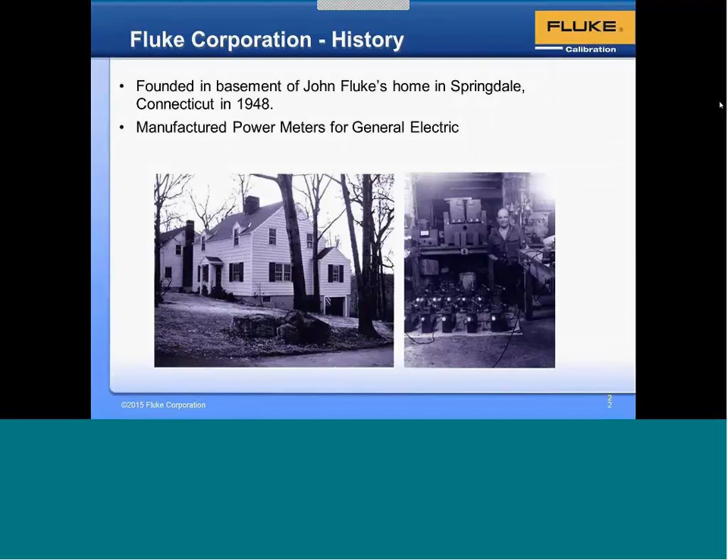Today, we have over 2,400 employees worldwide, and the corporate headquarters is located 30 miles north of Seattle in a town called Everett. These products are distributed in over 100 countries, and the Fluke Corporation has different brandings. There's the Fluke banner, which is primarily oriented around the multimeters and power meters you may well be familiar with. We have Fluke Biomedical, which services the medical markets. We have Fluke Networks. My particular group is the Fluke Calibration Group, and all of these companies fall under the Danaher Corporation banner, which also includes companies like Keithley and Tektronix.

Here's an idea of some of the products that we supply worldwide. The top of the list is our calibration equipment and measurement standards. These products are sold into the national labs of various countries. We get into the premier level of metrology with these instruments, and these instruments are all used to calibrate, for example, all the instruments you see below. We also have process calibration tools for the field calibration of processes and factory equipment, the regular multimeters that you see with electricians oftentimes, and then biomedical equipment. One of our newer entries is the thermal imaging instrumentation, the thermal cameras used in a very broad spectrum of markets, anywhere from simple housing energy studies up through thermal preventative maintenance issues with large equipment.

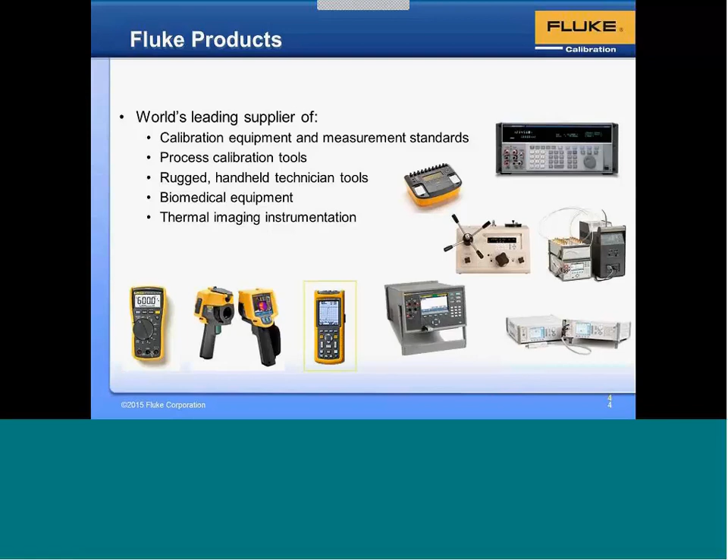Again, my group is the calibration group, and we're pretty proud to say that we're one of the largest calibration-focused businesses around, and again have global sales, manufacturing, and service throughout multiple regions. We have solutions for electrical calibration, temperature calibration standards, and pressure and flow calibration. Those are our three primary discipline areas.

On the data acquisition side, again part of the calibration group, we started off in 1974 with John Fluke Sr. putting out the very first, as far as we know, commercially available microprocessor-based data logger. From there, we were also one of the first to offer an off-the-shelf wireless logger solution for 900 megahertz and 2.4 gigahertz in 1994. When we started getting into our other products, we offered up the first Ethernet-only data acquisition system. In other words, there was no other way to communicate with us, no RS-232 or USB or anything at that time. That was in 1996, and it was a very successful product line called NetDAQ.

The follow-on to that was an introduction of a large frame Ethernet-only product called the 2680 series. That's where we ran into InduSoft after looking around the block, and we found that we had some needs that were unserved, so we engaged InduSoft to work on the FlukeDAQ product, which I believe was around 2000 when we launched that, and that was FlukeDAQ 1.

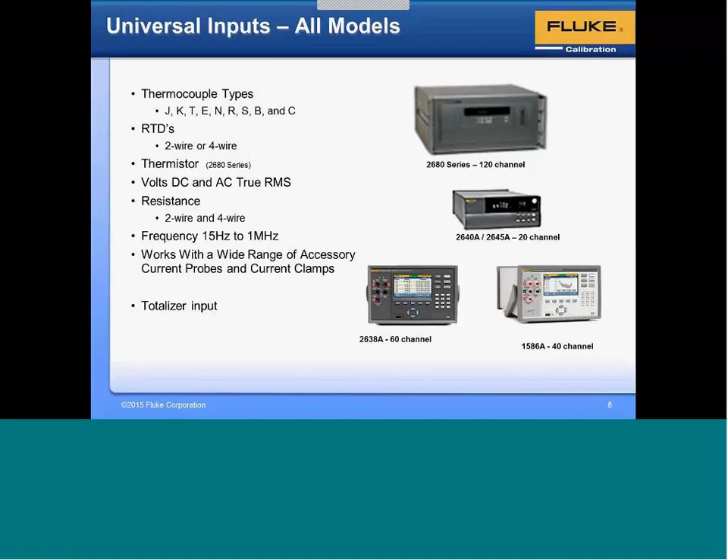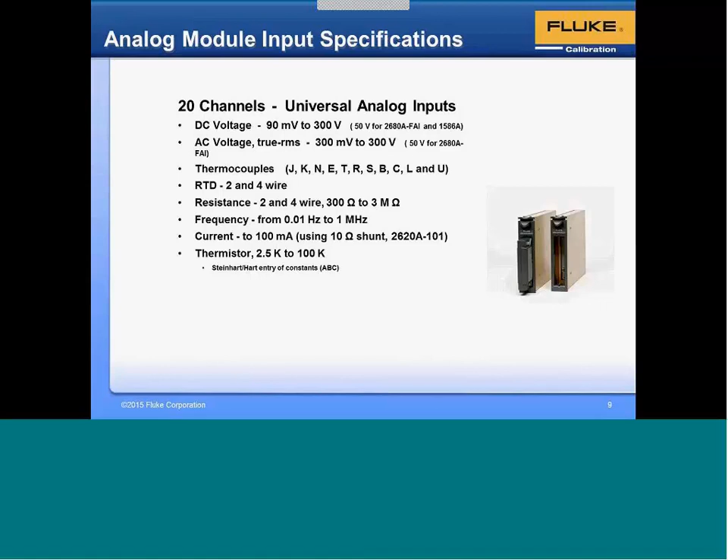The analog modules that we have, or the analog inputs, come in basically 20-channel blocks, if you want to consider it like that, with universal analog inputs. Here's some more detail: DC voltage up to 300 volts on many units, AC up to 300 volts, all the thermocouples, 2- and 4-wire RTD, resistance, frequency, current, and thermistor type inputs. These are common to most all of the products that we have.

The newest product I mentioned is the 2638A, and that's the Hydra Series 3. We have a sister product to this called the 1586, which is part of our temperature discipline group. They're out of American Fork. They've been tailored for various specifications depending on the market need.

The 2638 is expandable, comes base with 20 channels, but is expandable in 20-channel increments up to 60 input channels. These are all relay isolated channels, so very high isolation, limited to very few ground loops. Our hallmark specs here are the thermocouple accuracy, which has been the hallmark of all of our data acquisition products.

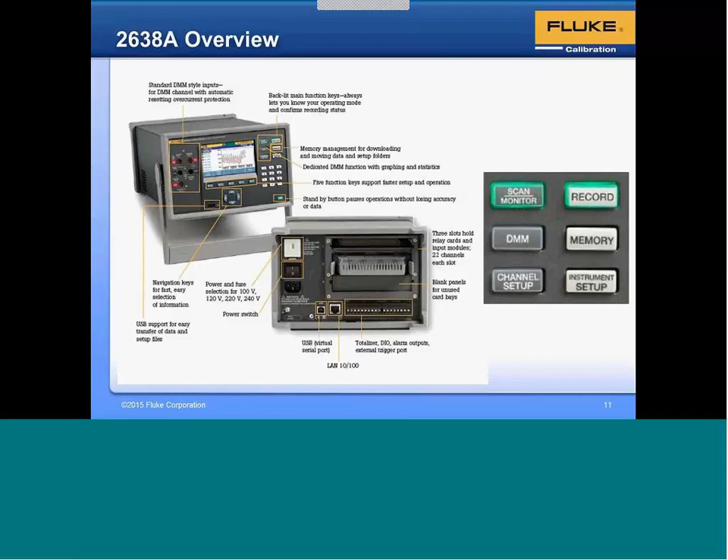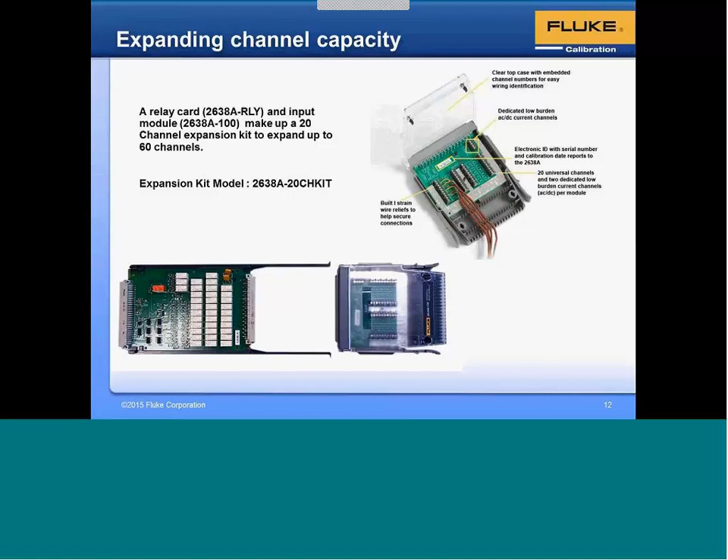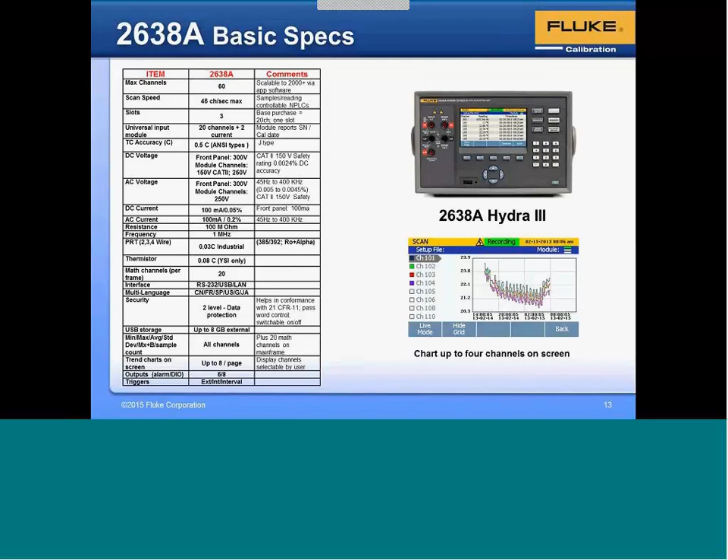One thing before we go on, the chart in the lower corner shows charting of 4 channels that we can do on the instrument. Being a standalone instrument, you may want to take a look at channels as they're being recorded, so you have the ability to change that. You also have all of the data, as shown in the upper screen, of the data coming in, plus you can do concurrent statistics on that screen.

Now that we've gone through the overview of the hardware, my favorite part is really the applications we've been involved with. These next few slides are just broad examples of applications Fluke has been involved in since day one on the data acquisition front. After that I'll show you a couple of modifications done using the InduSoft's FlukeDAQ package.

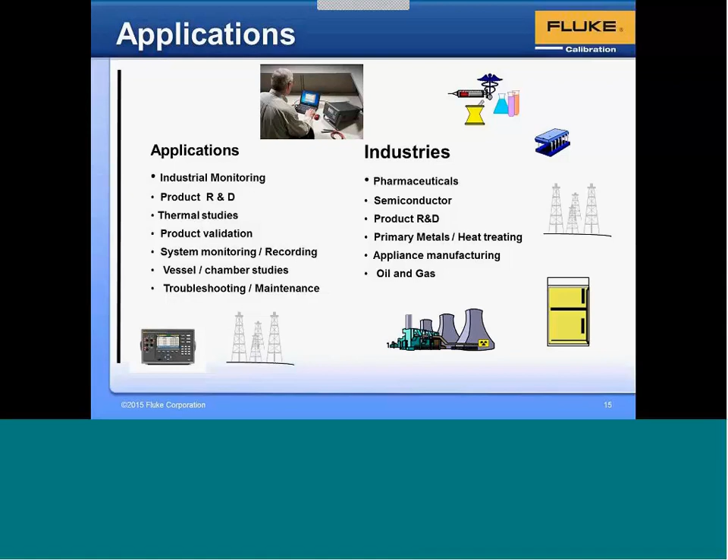This is where we're monitoring high voltage switches, where you might be in a distribution yard bringing in several kilovolts of voltage that need to be switched to another area. This particular monitoring system monitored the air pressure or oil pressure which drives the conductor into the switch, because there's a lot of concern over connectivity there, so they can't have anything conductive. So they monitor the pressure switches, the pressures inside the vessels that slam those switches shut, in more of a preventative maintenance and monitoring mode. That's one I tend to like as a point of interest.

On the next slide, we have the pharmaceutical area, where we do a lot of work primarily in chamber validation for a lot of different groups. We also monitor process temperatures and things of that nature. Some of the engineering efforts go through experiments where they're monitoring titer points, temperatures, and pressures.

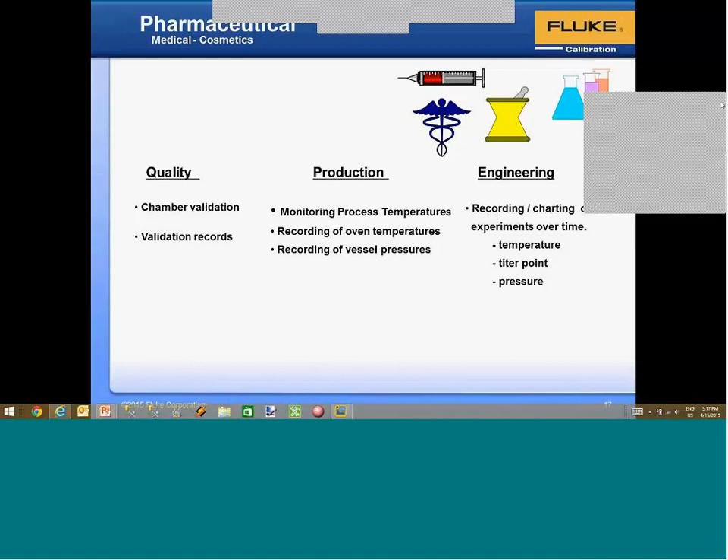Another slide here brings us up to aerospace applications, probably one of the largest application areas, in fact I think the largest application area for Fluke data acquisition products. Primarily we center around defense contract folks, people who get into satellite work where they're monitoring large vacuum chambers and testing satellites inside those chambers, where they need temperature profiling across the entire area.

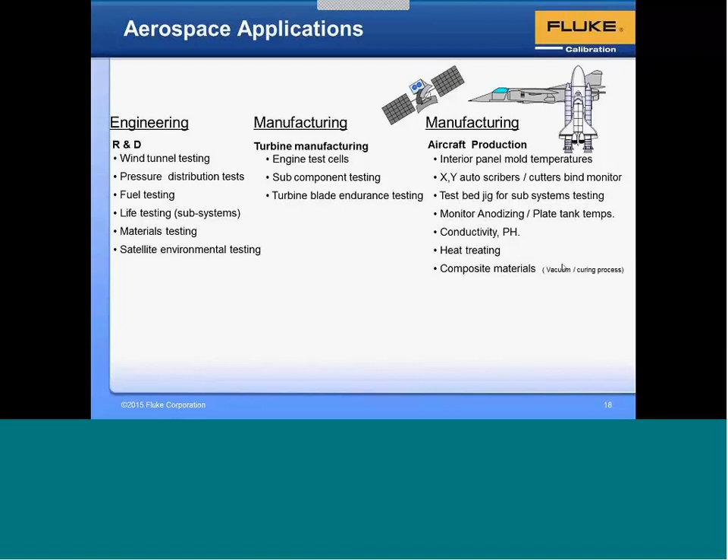We do engine test cells for turbine applications, turbine manufacturing and validating. A lot of different things that are done. The heat treating, the AMS 2750 area, we also do a lot of work in that area as well.

So aerospace is another big application area for data acquisition. And then the last one is the electronic manufacturers, that's us, that's people like Fluke. In those types of areas, there's a variety of groups, a quality group, engineering group, manufacturing type thing. You can see some of the applications we've gone in and helped solve some of the measurement problems and issues, all the way down into some of the wave solder machines that need certain heights and preheat zone temps monitored, especially when they're getting out of control. So we do a lot of different applications overall.

And that brings us to, I do believe, the Fluke DAQ application itself.

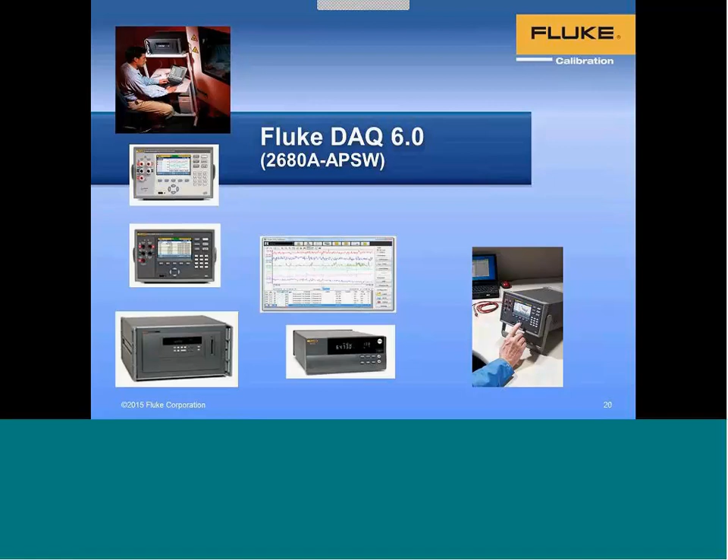Fluke DAQ is something that we have had InduSoft put together for us to communicate to all of our equipment. When we came out with the 2680 around 2000, I believe it was, we recognized that what we really needed was one application that had the flexibility and scalability to not only service the instrument, which is just the primary get it out the door thing, but more importantly to service the customer and the growth of their application and our future products.

So after an extensive review of people out in the marketplace, we selected InduSoft to provide those features for us in the Fluke DAQ application. And I do have to say, Fabio, that we're very happy we made that decision in retrospect.

Some of the basic customer needs we were trying to solve at the time was, of course, to have it work with all of our data acquisition equipment. And we figured we wanted to be able to support up to about 2,000 channels. In actuality, it will support more than that, but that was kind of the limit we put. We have had many customers bump into that limit and have accommodated their growth from there. We wanted an OPC server so we could communicate with other programs, and a web server so we could have web interface and viewing from various points.

Thank you so much, Bruce. I do appreciate it, and thanks for the comments about the partnership with InduSoft. It's definitely mutual—we appreciate the partnership very much, and I'm sure it will continue to be a successful one.

I'm sure. Getting started here, a brief overview about the architecture. As Bruce mentioned, Fluke has many different series of devices with several unique advantages and data acquisition devices with a lot of accuracy and the ability to work in a standalone mode and store information locally on the devices.

The Fluke DAQ software was designed in partnership with Fluke, pretty much with the concept of being a single point of configuration and monitoring for one or several devices connected to the software through any TCP/IP interface—wired Ethernet, Wi-Fi, any TCP/IP interface. About 10 to 15 years ago we released the first version, and we have been evolving this application over time.

As Bruce mentioned, the Fluke DAQ software is simply an application designed with the standard InduSoft Web Studio. This application was put together with three main points to bring value to our customers—three major value propositions. The number one is ease of use.

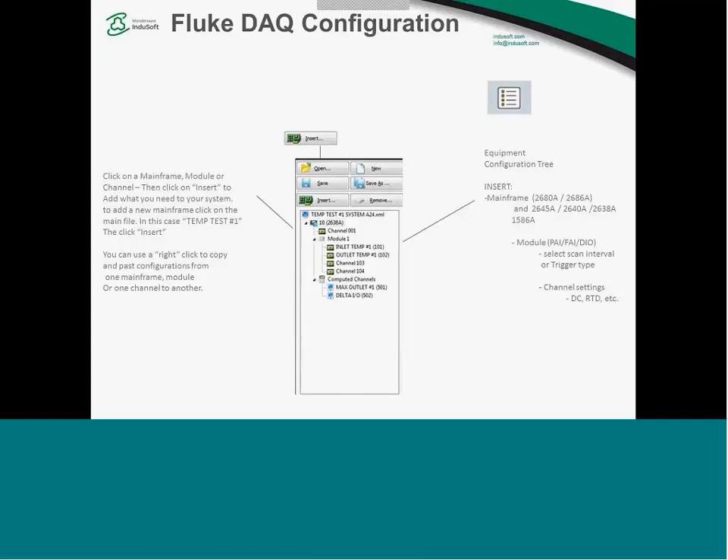On the tree view, you have a hierarchical view of the devices, including their modules and channels, as well as computed channels, which are like virtual channels, not physical channels, that can generate information based on expressions that you define in Fluke DAQ itself.

The configuration is as easy as 1, 2, 3. Number 1, you click Insert and select the type of device you want to insert. Number 2, you add modules for those devices. Most Fluke devices are very flexible and allow you to have a number of modules. Then you add the channels, configuring the channels available in each one of those modules.

As you see here in the tree view, you have a hierarchical view of the devices, modules, and channels. Then it's just a matter of configuring the settings for the channels, and I will demonstrate how easy it is to do a configuration in a few minutes here in the demo.

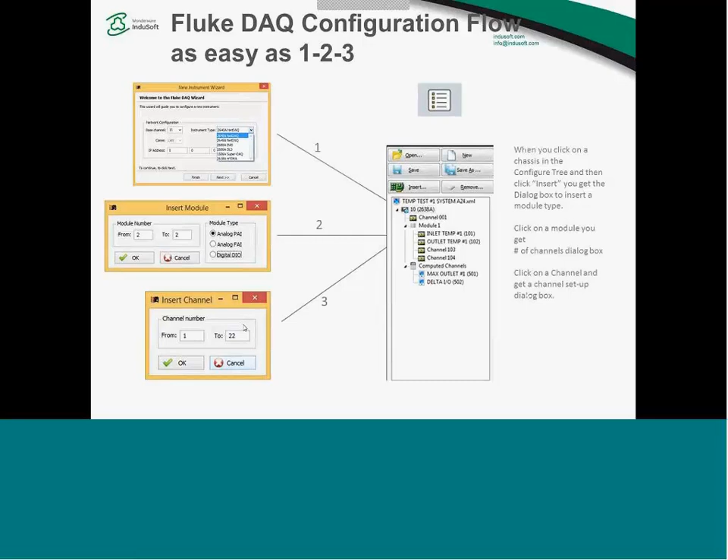There is a nice feature called data file configuration, which is an easy way for you to generate reports automatically. You can define as many reports as you want, define which channels from which devices should be saving data to each report, and define how those reports should be generated - by day, by period of time, by size, by number of lines, and so on.

You also have the option to not only download but also upload configurations to or from the devices, not only using a TCP/IP link but also using a USB interface for Fluke devices that support it. You can also upload not only the configuration but also the history data stored locally on the device in a store and forward mode.

On the monitoring screens, you can stop and start the scan. Keep in mind, everything I'm showing are screens designed with InduSoft Studio, but they are fully functional to support one or multiple devices communicating with this application during runtime.

You can start or stop the scan from each module individually or for all the modules at once. You can get history information from the devices per device, per module, or for the whole system, and import this information into CSV reports that you configure in the system itself.

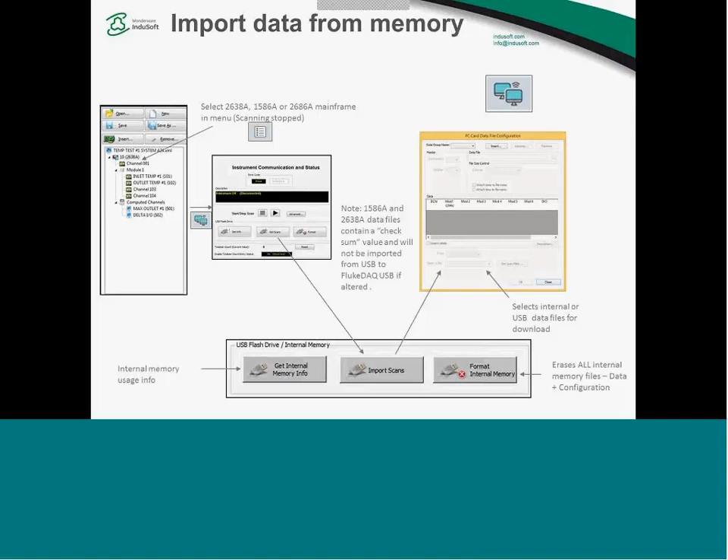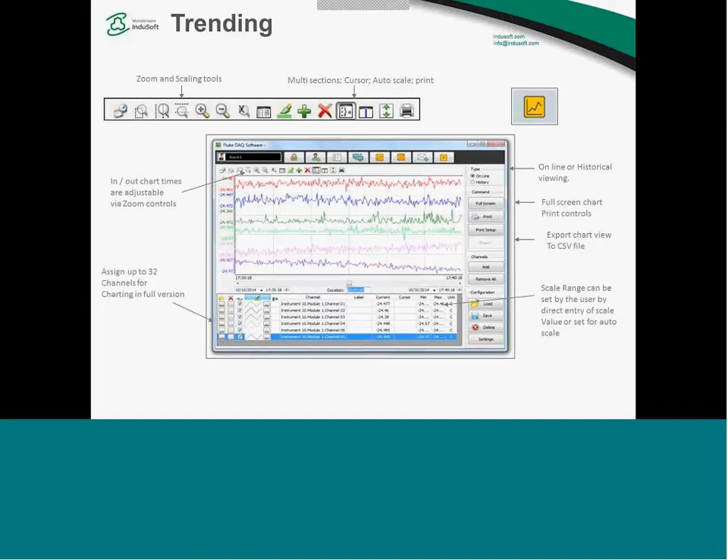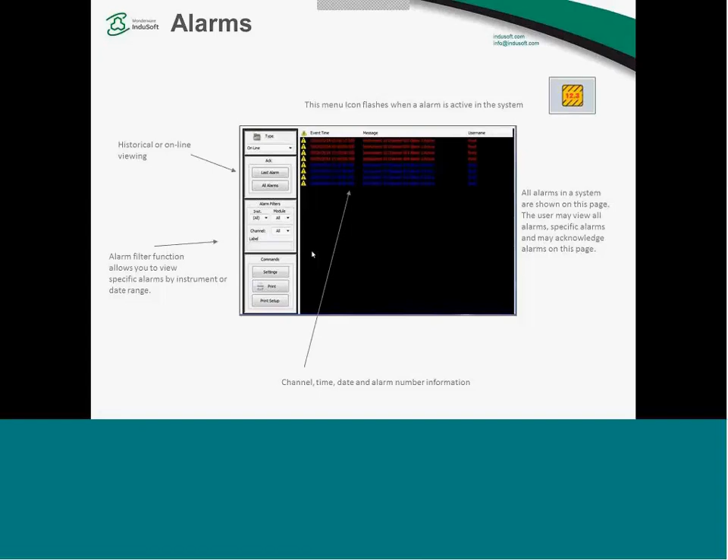So talking about interoperability in a little bit more detail, as mentioned before, Fluke DAQ supports DDE and OPC out of the box. DDE is still very popular in lab applications where it is required to visualize and link data from the DAQs in real time with Excel, usually in Excel worksheets that are used for many different purposes.

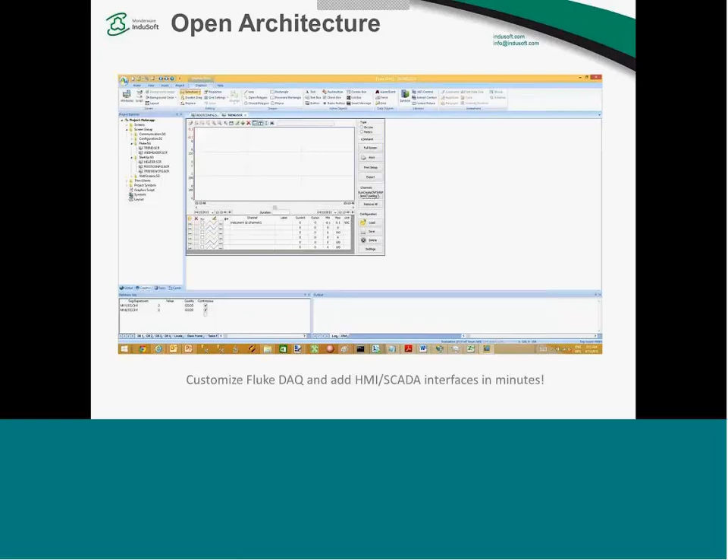Finally, but not less important, there is the huge flexibility and advantage to customize the standard Fluke DAQ application. Some customers use Fluke DAQ as is, because it's fully functional, but many customers take advantage of the fact that they can purchase an InduSoft Studio development license and add their own custom screens to the standard Fluke DAQ application. They can create screens with their tanks and ovens, bring data from different devices like PLCs, send data to different devices, and pretty much merge the Fluke DAQ application with their own HMI SCADA application, just like you can merge two or more InduSoft Studio applications. So you can customize Fluke DAQ to your particular needs.

Talking about the runtime editions and add-ons — Fluke sells Fluke DAQ directly through its channels, and they offer two editions: the full edition with no limitations, and the light edition with the limitations we discussed before — one device only, no full screen mode for the trend, no remote notification for alarms, no remote visualization on the web browser, and disabled ability to export data from the trend as well as the OPC server.

You can always upgrade from the light version to the full version and get all the capabilities from the full version. In addition to the Runtime Edition, you can optionally purchase the standard development package from InduSoft and customize or modify the Fluke DAQ application, adding your own screens and interfaces.

There are also part numbers to upgrade Fluke DAQ from previous versions to the most current version, not only the full edition but also the light edition. And there is an add-on to TrendLink to the most current version, 10.0, as well as a part number to upgrade the external TrendLink from an older version to the most current version. So those are pretty much the main part numbers involved with Fluke DAQ.

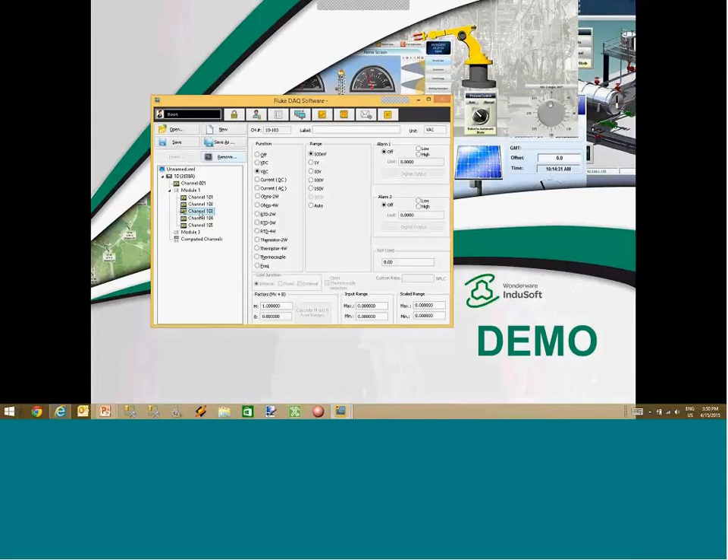And here on the root level, you also have this option to enable data simulation. So if the device is not available for whatever reason, Fluke DAQ can simulate data so you can test your reports and your interfaces before connecting to the actual device.

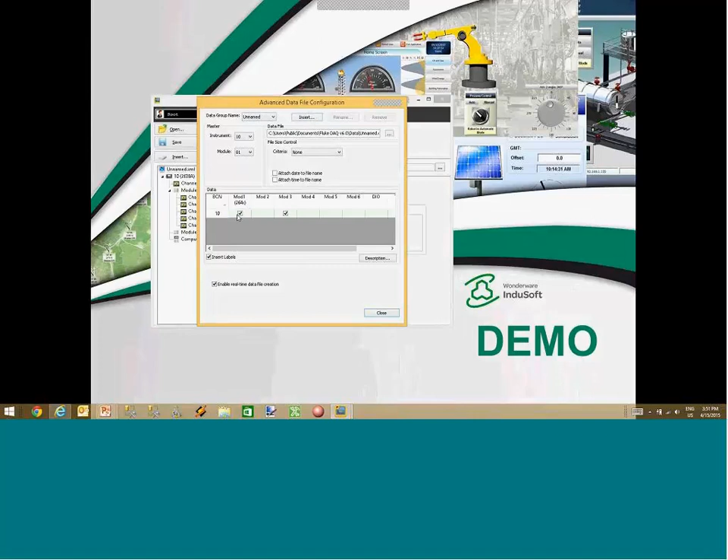And here in data file configuration, you can define as many reports as you want, and keep inserting reports to your configuration. For each report, you define which modules and which channels you want to add, and how you want to break the report: by a particular time in the day, duration of time, file size, or even number of lines. Fluke DAQ will automatically generate those CSV reports with the data collected from the DAQ devices.

Also, an important point I didn't mention: the Fluke DAQ devices are able to acquire data at a very fast rate, faster than would be feasibly possible for software to read through the Ethernet interface. But it has the ability to buffer, to save this data locally on the device itself, and the Fluke DAQ software will automatically download this data from the device in chunks and dump it into the CSV reports with precision of 1 millisecond in the timestamp.

So after the configuration, you can come here to the communication screens and enable the scan for each device individually, or for all devices if you hit the play button at the root level, and it will scan all the devices in the network and start communicating with all of them.

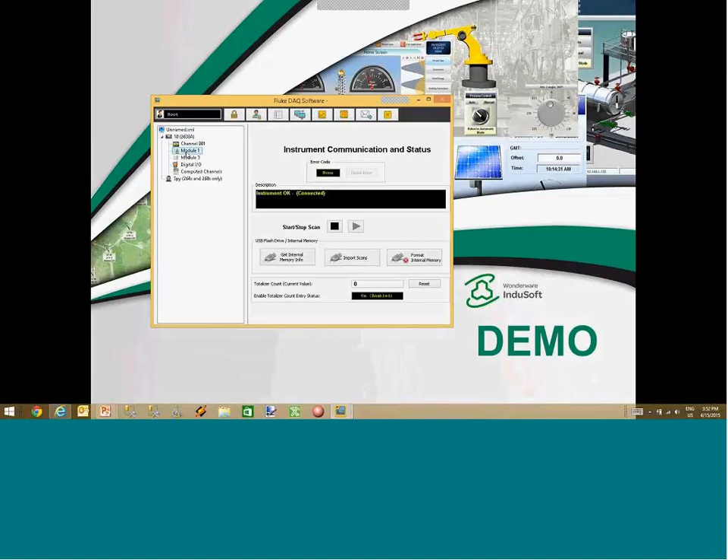So if I go, for instance, to module 1 here, it collects the data from all the channels available in this module and shows the online values on the screen. On the webinar you probably have a delay, but I can see the channel values changing on my screen at a very fast rate, perhaps 10 times a second or so.

You can also use the SPY interface to select different instruments and visualize values from the different modules, as well as digital values from the IOs available in each module, and computed channels, if any, configured in the device.

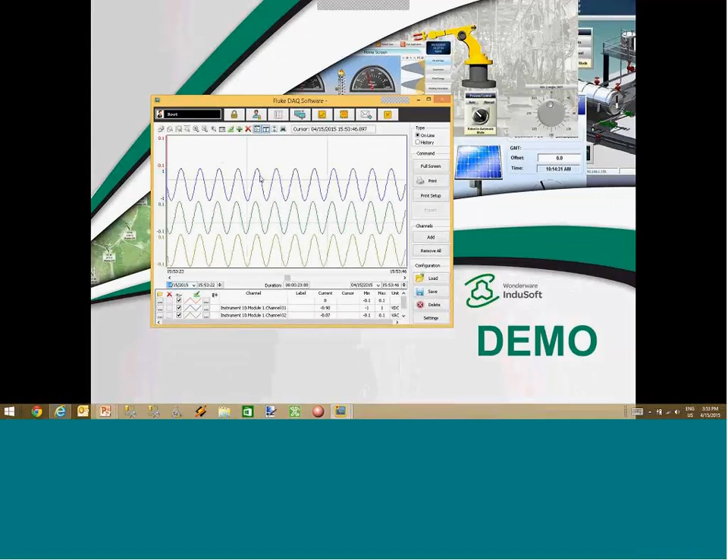Then you can also use the trends interface and visualize values from the pens available on the devices. You can visualize trends in history mode or online mode. You can alter screen scale, remove pens on the fly, add pens on the fly, zoom in, zoom out, save profiles, load profiles, and use all the features built into the trend control from InduSoft.

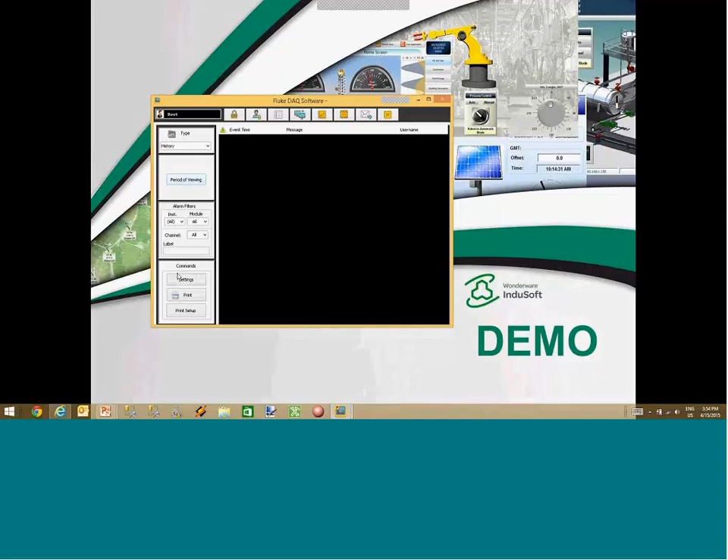Alarms as well: if you configure alarms, you can visualize and acknowledge online alarms, or visualize the history of alarms, filter them by period of time, by number of days, and so on, and also dump them into a PDF report or directly to the printer.

Finally, just by clicking on this button, it will run a web server, and then you can visualize the screens from a web browser. You can also configure the email settings here, including authentication, if you want Fluke DAQ to send alarms by email or text message as remote notification.

So in a nutshell, those are the main features, the main capabilities available in Fluke DAQ. Again, it was designed to bring ease of use, flexibility, and scalability, and also the ability for you to customize it—either use it as is, as a standalone application, or use the Software Studio development environment to customize it and add your own screens to the existing screens available in the application.